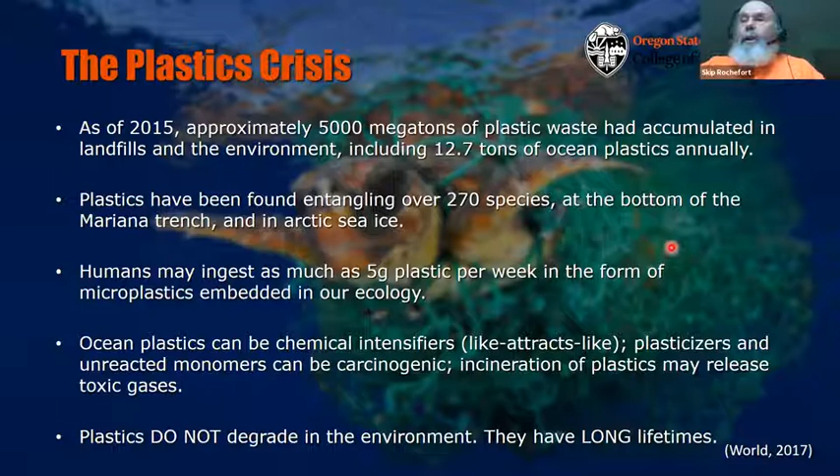There's a whole bunch of numbers around, but basically if you said only about 10% of the plastics actually get recycled worldwide, I think that's a pretty good number. Which means that 90% of these things just go into landfills or get burned. So when they went to China, we didn't know what happened to them. They could have been burned for fuel because at that time they were fuel hungry. But anyway, not many of them get recycled.

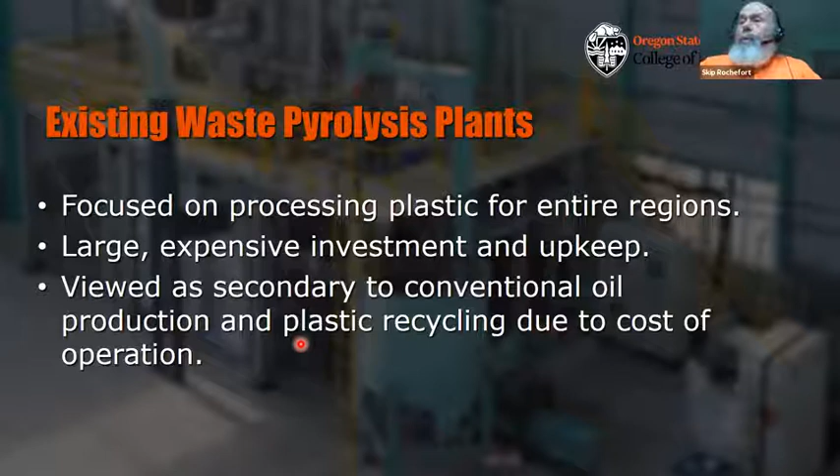All right, so what was our mission? Okay, wait a minute, I just have to fix something here. I can't see part of my, there we go.

Our goal was to develop an inexpensive open source reactor with simple operation and minimal maintenance. I wasn't going for the big projects, the 1 million ton things. What I wanted to do is give people like Captain Andy, who's on an island and has nothing to do with this plastic, the ability to take that plastic, put it in a reactor of whatever size he needed for the capacity he had, and turn that into a fuel. Diesel fuel, which he can use in his boats. He runs 4 boats. There are other places that have tractors and things like that.

That was the goal of this. And honestly, the stimulus for me to start up with this again about 2 years ago came from a woman in Eugene called Helen Liu. And Helen is a very persistent young woman, okay? She's an artist, and she said, I want to do this and have one in my community. I want to put it down the street. And so at first I thought she was a little bit of a wacko, but anyway, she's very persistent.

And anyway, she's been a great advocate for our program. She basically kickstarted me into looking at this again. So I do want to recognize her. And I do want to recognize Scott Farling, Titus Recycling, and the Ocean Network. Okay, so a lot of people pushed us this way, even though it'd been something that I was very interested in for quite a long time.

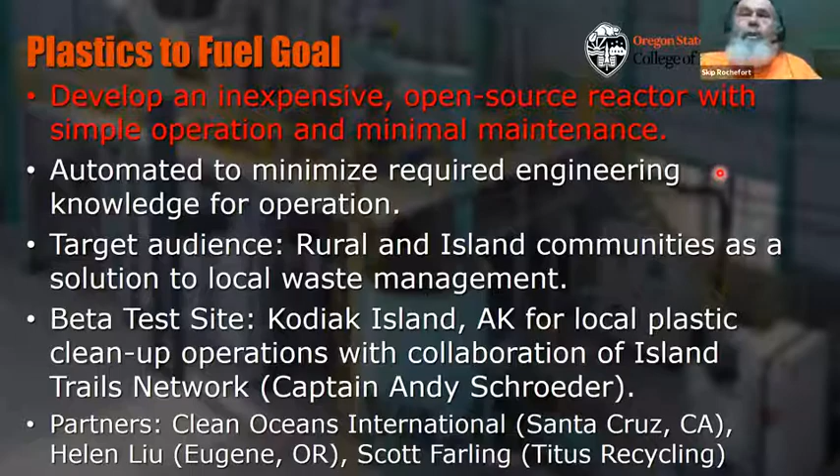Now, what we're shooting for in our system is diesel fuel, and we'll show you some of the distribution of the carbon numbers that we get for that product. But anyway, that's our goal, is to take this product and turn it into something which is usable. Now, I will say, as a side here, we are pursuing some other projects where we do gasification, and use catalysis to come to actually very specific products. And that's the work that Kostas Goulas is looking at.

And some of his grad students have also started to look at PVC, polyvinyl chloride, which is not a nice polymer to degrade because you have chlorine coming off, but he's also started to look at ways of dechlorinating that and then using it to turn that into a fuel. So there's some pretty exciting things going on and some novel processing going on also. But today I'm just going to talk about where we are with what I would call the small scale reactor.

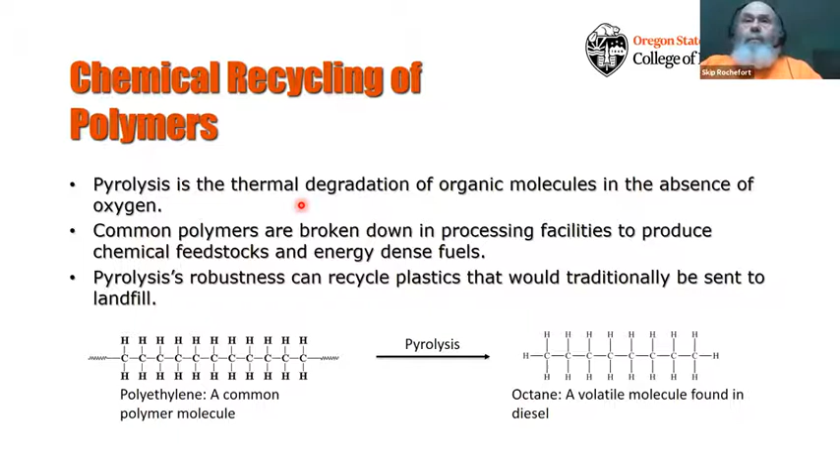I wanted to have this such that you have this reactor on the ground, you stick your plastic in it, you put your little container on the outside, and you get diesel, which you then pour into your tractor or boat or whatever. Okay, so lots of people have been saying, Skip, you should do this and you should do that to refine the product. And yes, we could do that. But I want you to keep in mind what our goal is: simplicity and a DIY kind of product, which hopefully anybody in any country could put together themselves. So anyway, that's kind of the goal.

Oops, what did I do? Sorry, wrong. What happened here?

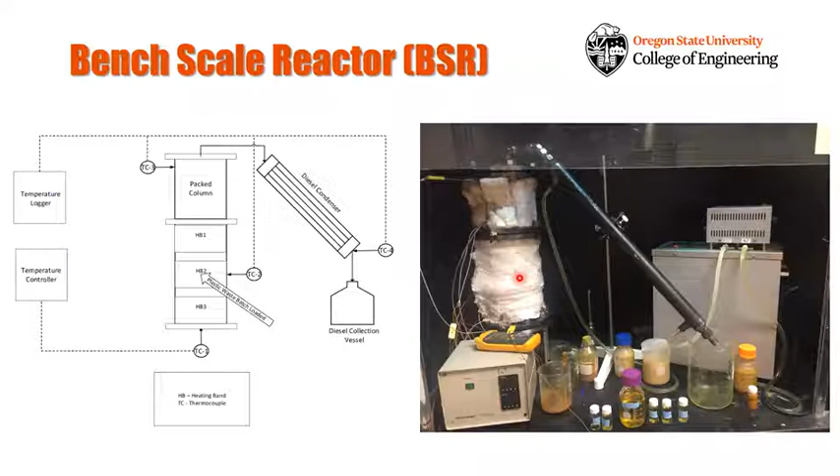So, we want to... May I ask a question? Yeah, sure. So the greatest problem with recycling plastic is the diversity of the source, and then all kind of nasty stuff that goes in, colorants and modifiers and all of that. Is this part of the research as well? Sure. Or are you dealing with virgin plastics?

No. Obviously, so again, I'm just showing you the beginning phase of the virgin stuff. But that's really obviously the ultimate goal, right? I mean, they pick this up on the beach and they throw it in there. So we've got stacks of ocean plastics sitting in our lab, and a whole bunch of other types of plastics, which we're going to work on. And we have worked on it.

And what happens is colorants are not a big deal, plasticizers are not a big deal because they burn off pretty easily. Things like glass fiber and other stuff like that will fall out in the solids content. So at the end of this thing, we have some residual down here, right? And that residual is either charred material or some of the inorganics, which you have to deal with. And so I think the beauty of the project overall is that,

except for PVC, which is a little bit of a problem because chlorine gas can kill people, right? The other plastics, we can put all of them in there, and whatever you're talking about will come out down the bottom here, which we'll need to clean out, but we can still gasify them. Now, here's the thing. Why would you want to gasify PETE? It's really not a good thing to do that.

So the idea would be that you could separate out your PETE if you're in this country, right? And then do something else with it. But if you did it, you can still gasify it or pyrolyze it. And all that happens is that your energy ratio gets a little bit worse. But if you're not worried about your energy ratio, if you're just worried about cleaning the plastic waste, the beauty of this is that you don't have to be making money.

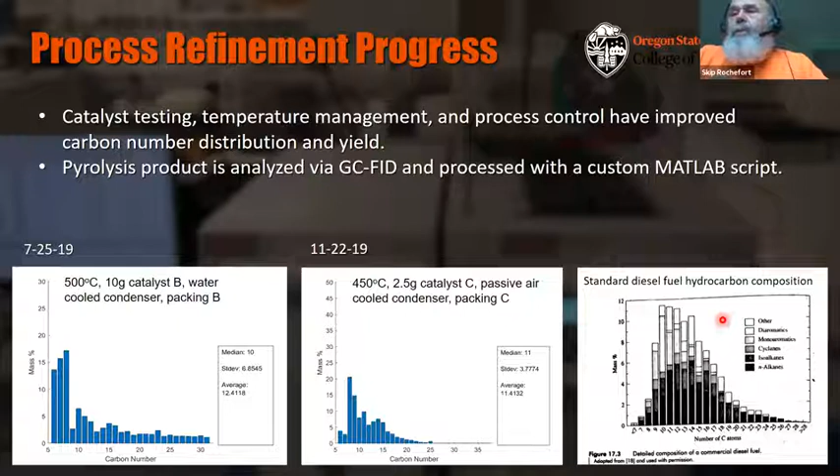Right. So if you want to go to the next slide. Okay. Are you going to mention the catalyst that we used? Yeah, that'll be on the next slide. Okay. All right. Oh, yeah. So we've got a lot of data here, and this is just a few of the important parameters that we started covering.

So I'll start with the catalyst type that Skip mentioned. We started with, let's see, we tried iron oxide, I think, and didn't really get good results. And that isn't even one of these parameters here. But we did uncatalyzed. We tried nickel-doped silica alumina, and then there were some papers talking about bentonite clay, and that's actually catalyst C down there. You see it's not very active.

So you can see which one we likely went with. Catalyst B there is the silica alumina. Excuse me, may I ask a question? Sure. Could you explain the graphs for us, for non-chemists? What do we have on the x-axis? The letters are pretty small, so it's difficult to read. And what we have on the y-axis, and what is good, what is bad when we look at them.

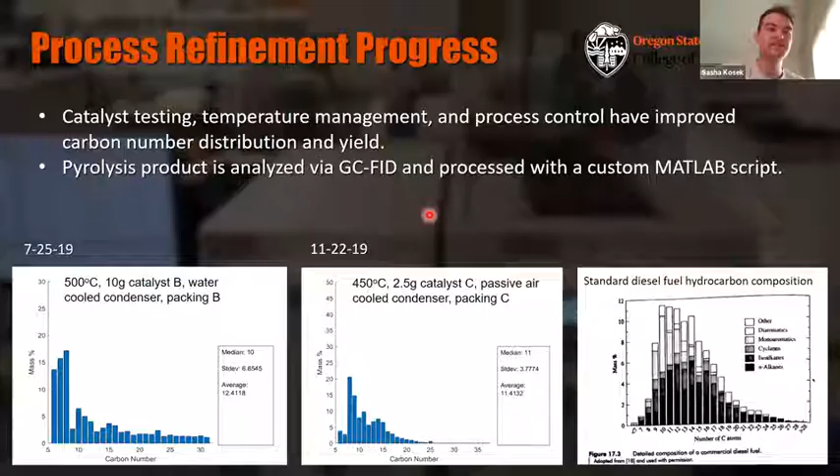Right. Okay. So the x-axis is a carbon number, so it's the number of carbon atoms within a carbon chain. So on the far left there's pentane, number 5, and then it keeps going up until you've got carbon number 25, carbon number 30. And if we look at the previous slide, there was that carbon distribution of standard diesel fuel. And our goal is really to match that in terms of the carbon number.

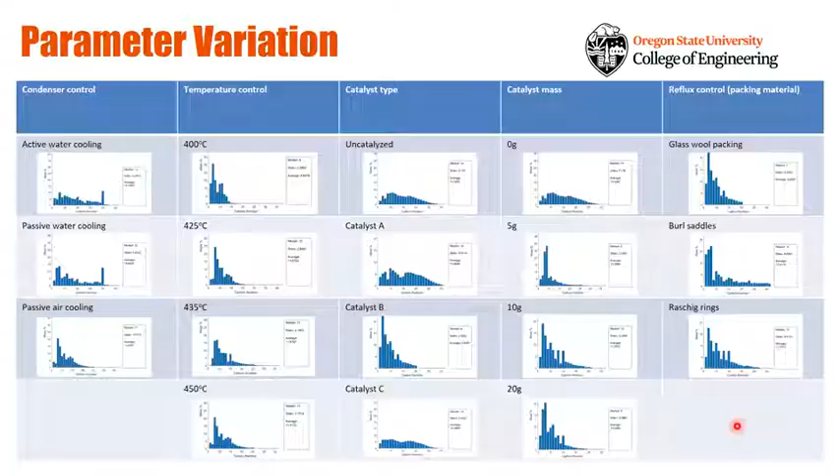So if you look at that, standard diesel fuel goes from about carbon number 7 to somewhere around 21, 22, 23. So that's kind of our goal. Thank you. Right. And then on the y-axis is either mass or mole percent, so the amount of material that comes out at that particular carbon number. Great, thank you.

There are a couple things that our method can't analyze. This is really just showing carbon number, but it's not showing the degrees of saturation of our hydrocarbon chains. That's something that we'll have to look into a little bit further. But let's see, what else did we work on?

Condenser control. So we started out with forced water through a double pipe heat exchanger as a way to cool our product stream. Then we moved forward with passive water cooling, which was basically just having the water sit in our condenser tube and letting it naturally convect with the flowing hydrocarbon vapors. We have landed more on passive air cooling, where we simplified down to just a copper tube with natural convection as a way to remove our shorter hydrocarbons.

So with the active water cooling, there was a risk of condensing carbon number 6, which we want relatively low amounts of in our product. And we found with passive air cooling, we could reduce those pentane, hexane hydrocarbons.

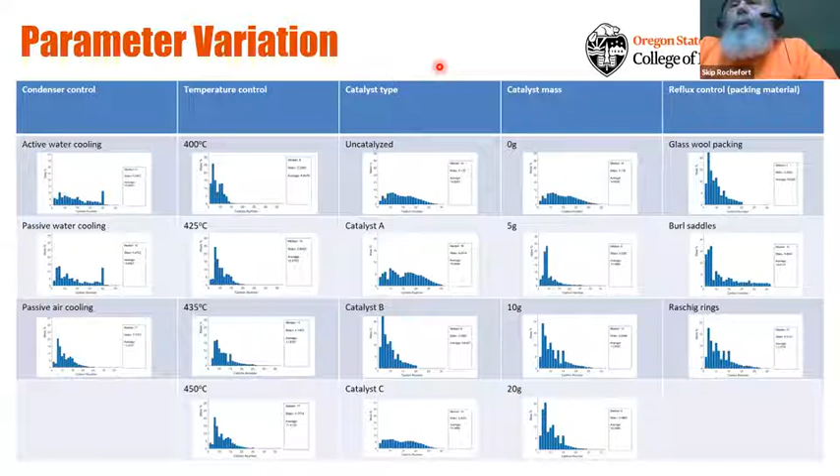And sometimes we didn't really show you, but sometimes we also get waxes out rather than liquid. So if you go back again over here. See, there's a little waxy product there in the background. So now it turns out chemical companies actually like the waxy product. So if we were trying to give it to a chemical company, they actually like this because then they can convert it into more different things.

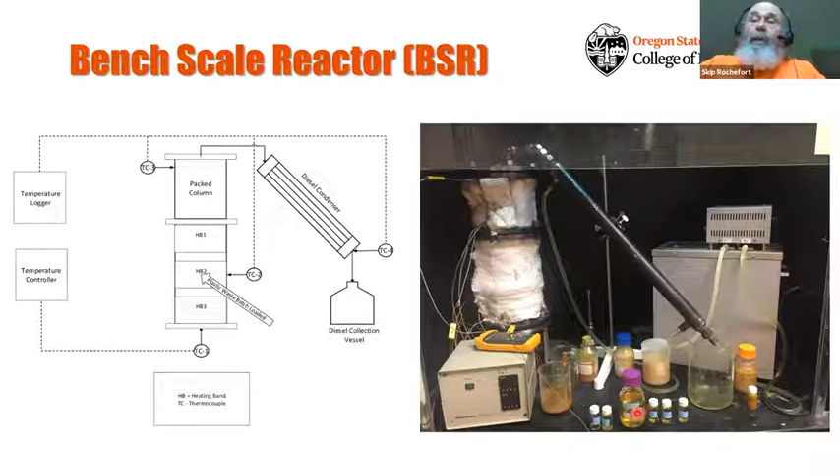But again, remember our goal, right? Our goal is to be able to give somebody this stuff here and let them put it in their equipment. Okay. All right. Is that good, Sasha? We good on this? Yeah. Okay. I think so. All right. So I want to move on.

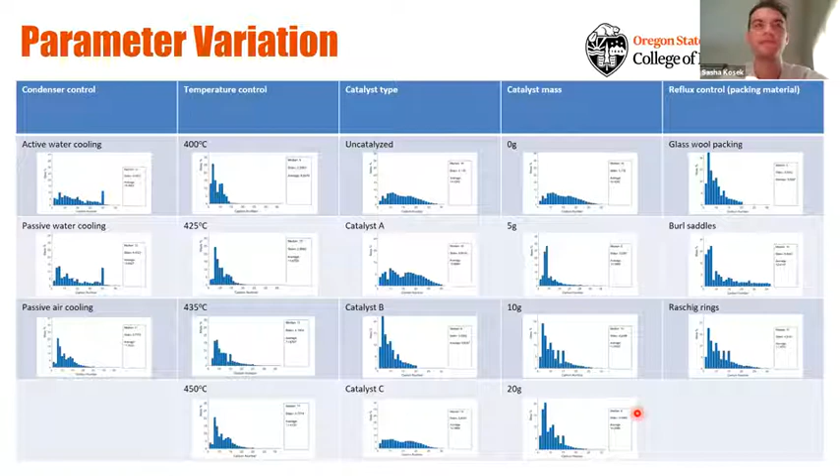So that was all done with what we call our bench scale reactor, that little guy I just showed you. Clean Oceans International, a couple of years ago, I contacted them, and they had purchased this particular reactor, which is a lot larger, and it's also a flow-through reactor. So I contacted them because the person who had bought it, who was running it, left, and so it was sitting idle. And somehow Scott Farling actually put me in touch with them and said, hey, these guys have a reactor. And I was thinking of purchasing one of these, but I said, well, since they have one, let's see if we can get it.

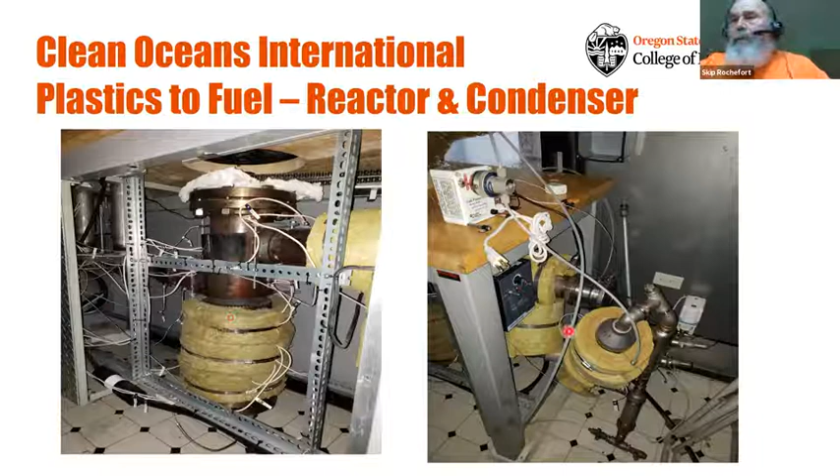So many conversations, and about a year and a half later, we got it up here, and here it is up now at OSU. So this is what it looks like. So there's the reactor, and then there's the condenser part of the system, I think. Here's what it looks like. So it came up in a trailer. It weighs about 1,100 pounds, this system here.

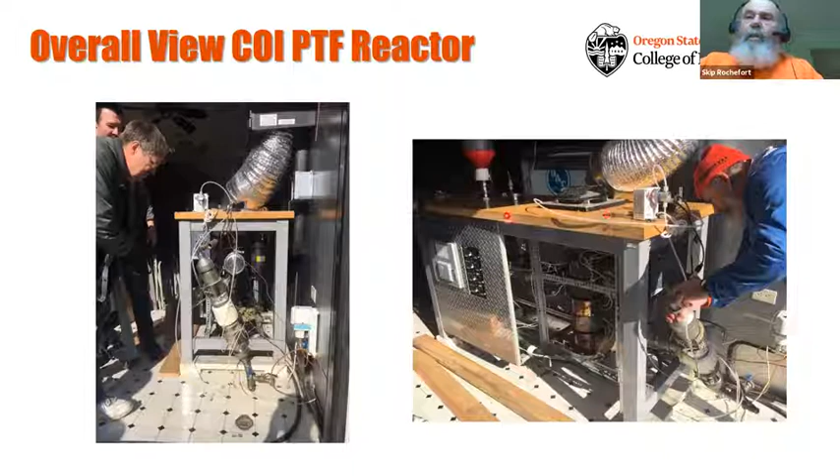So thanks to the Forest Research Lab folks and the College of Wood Science and Engineering people, we were allowed to move this into, I guess we call it Oak Creek West building. I think that's the name for it. And John has a space there where there's an injection molding system and an extruder. So we were able to move it in there after lots of conversations. So this is just a picture of the system right here, and we'll show you a schematic of it, but there's a hopper here, and it's actually a continuous feed system. What we're doing now is dismantling it so we can pull it out.

Okay, so again, here's the reactor. So you can see it looks very similar to ours, right? I can't remember if I saw this and then we made ours, or if we made ours and it just turned out to be similar. But anyway, they're very similar, except this guy's basically just ours on a little bit of steroids. Okay, so it's just a little bit bigger. You can process 50 kilograms per day. Ours, we really process about a kilogram every day or half day, something like that.

Okay, it's got a continuous feed system up here. It's got a way to deliver catalyst inline. We have somebody who's interested in helping us develop catalyst, and in fact, Kostas is a catalyst expert, so we may be working on developing new catalyst also. But again, for this low cost system, we want to keep to the catalyst we're using because it's very cheap. And then it does have a fractionating condensing unit in it, which is a little bit higher scale. So this is just basically a bump up in terms of technology than the one that we're building for community systems. So we're gonna work on this one also.

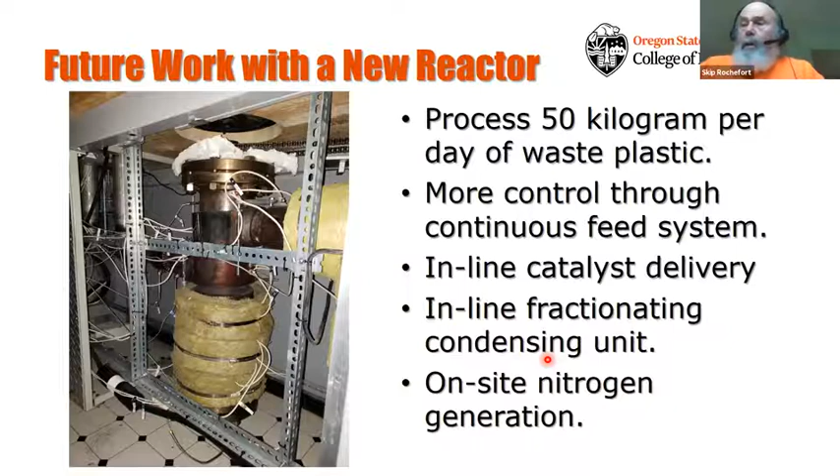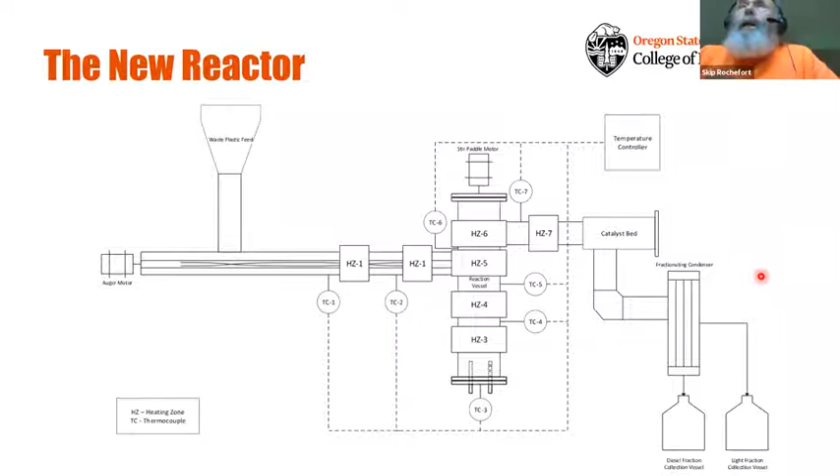So it's a small scale commercial system. I think it was designed for something like 50 kilos per day, so 100 pounds or so per day. And it was available commercially from a company in Michigan. Actually, the company is like one guy, and they only made 2 of them. He has one, and then this is the second one. So there's only 2 of these that are around, and we're lucky to have it.

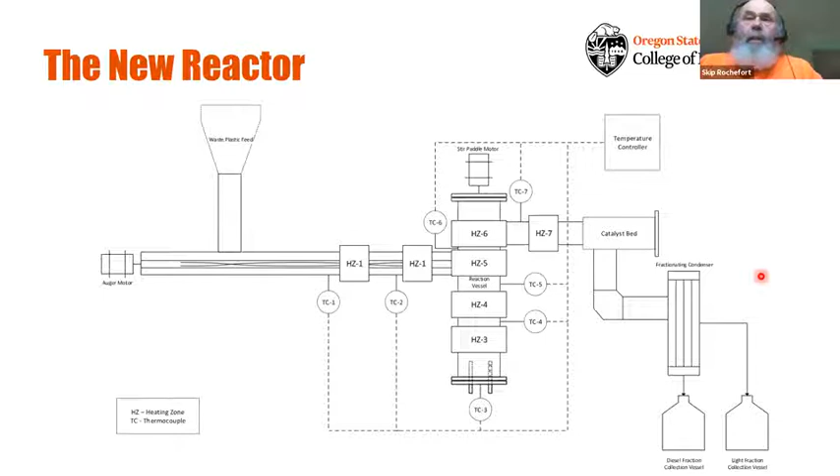So Clean Oceans International and Captain Homer let us borrow this on loan, and so we have it right now. We haven't run it yet because, I want to show you, this is called getting it out of the trailer and into the facility. And so we did that, and then successfully moved it in.

And so what do we want to do in the future? Well, obviously we want to move up. So we have 2 things going on. We have the bench scale reactor. We're going to continue to do some work on that. We'll go to mixed plastic streams in there.

We need to get the larger system, what are we calling this thing? I can't remember. What are we calling it, Sasha? The PTFT, or did we change it? Okay, we call it the PTFT, plastics to fuel in the trailer. So the plastics to fuel in the trailer unit, we need to get that going. We haven't even turned it on yet. I think maybe we heated it up a little bit. All of this was planned for now and in the summer, and I'm not sure where we're going to be on that.

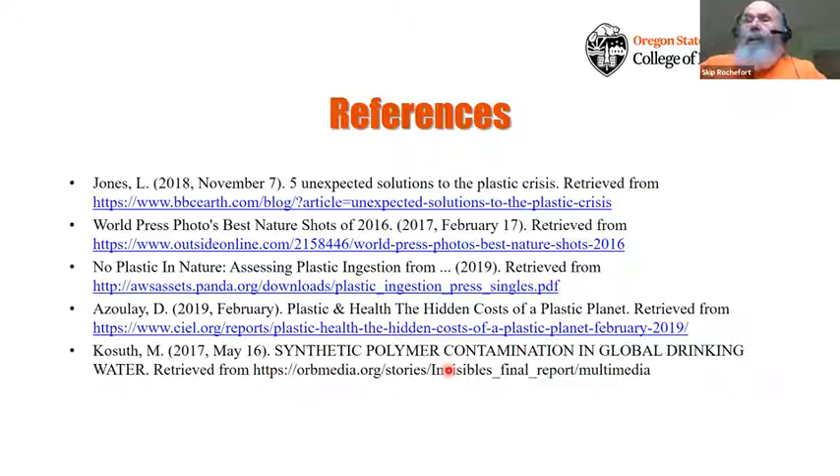And Helen came in and said, I want to support you. And she gave us the money to actually build that first reactor. And she has continued to support us quarterly with some funding to help pay these guys and give them some food. I'm really very thankful for Helen. She's a great supporter. She really is the one that got me off my chair and said, okay, you should do this. And so I want to thank her for that.

And with that, I'll end. Looks like we're pretty close to the end anyway, but we can take questions for sure. And again, I want to just thank my whole team.

So I can get out of this, I think. Yeah. Okay, oh, there's 11 questions. All right, let's see what the chat looks like. Okay, hold on. Let me read some of these questions. Shout out to artists. Yes. So somebody says shout out to artists, and I gave you the name. Tiana, thank you. You're welcome. A lot of little chat stuff going on here.